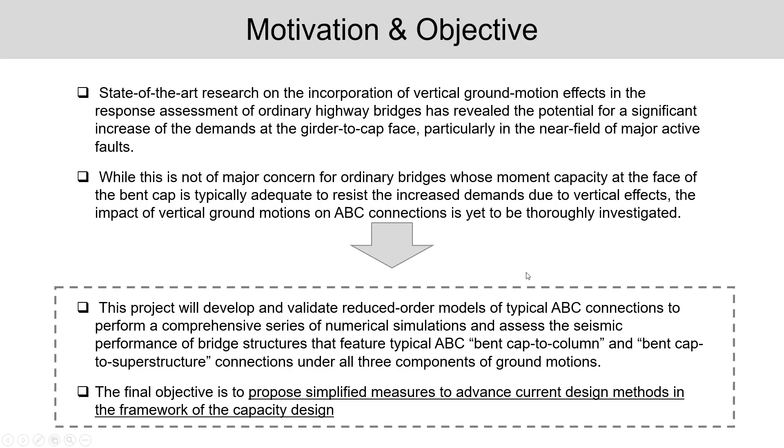I have been working with ABC connections and experimental earthquake engineering for the last 10, 15 years, and I can tell that this is a very challenging task. So some of the results that Dr. Petrone sent us to share with you today are really new and unique in this sense.

So what Dr. Petrone and her PhD student wanted to do in this project was a literature review first. We have so many options for seismic ABC connections. Which ones are the more common, the more popular, the easier at least to start with in terms of modeling? So the first task is just to shortlist the connections and pick one.

The second task is to build a micro model, a 3D finite element nonlinear model using one of the general software packages, and then use the results from the micro model to develop a reduced order model. Once you have a reduced order model, you can extend this to a full bridge. In this case, you can use software like OpenSees. These are much, much faster.

They are well suited to do system analysis for the full structure or the full bridge. They can do a lot of dynamic time history analysis with a lot of suites of ground motion. OpenSees, for example, is more suited to do hundreds of ground motions, unlike if you were to do it in ANSYS or Abaqus. So transitioning from a micro model to a reduced order model is of paramount importance for this project.

Then, they will identify a statistically significant suite of near-field motions. Again, for those who come from the seismic world, you might recall that the effect of the vertical component is highlighted in near-field motions. If you are close to the source of the earthquake, the vertical motion has high frequencies. The seismic waves that generate the vertical component arrive a few seconds earlier than the horizontal component.

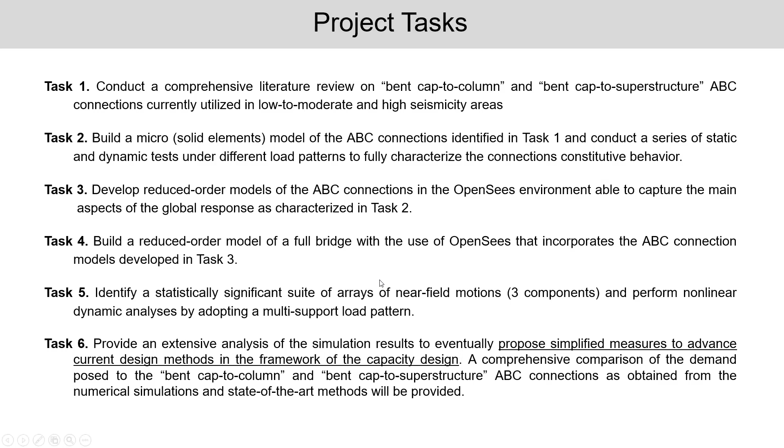So in terms of the first task, the identification of the connection: they did a lot of literature review, but this is just a final selection that they have made. They focused on precast bent cap systems. They focused on non-integral bent caps, although there is an integral bent cap. For those who are familiar with Caltrans bridges, 90% of their bridges use the integral bent cap system, and that is in high seismicity.

So they are looking into this as well, but this will be a second phase, or maybe in a future project. For this project, they are starting with the non-integral bent caps that are more suited for low to moderate seismicity. They are looking at the emulative cap pocket connection, where you have the precast column and the precast bent cap, and you have the pocket inside the bent cap, where you plug in the column,

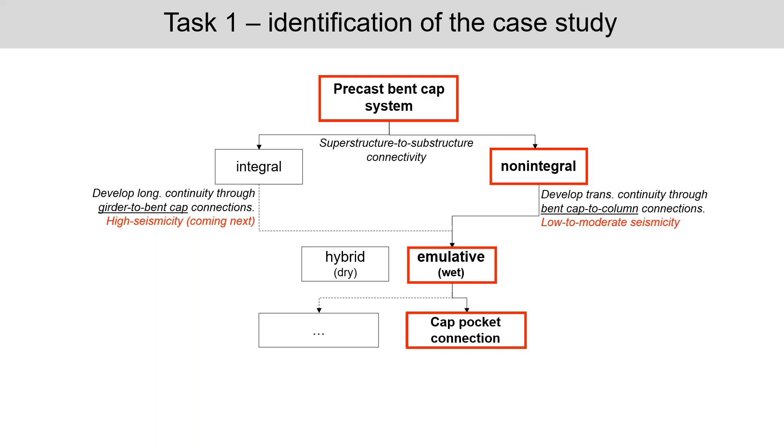and then you have the column reinforcement sticking out, and you fill the joint or the pocket with wet concrete. There is a dry version of it as well. But what they are looking at here is the wet cap pocket connection between columns and bent caps. So this is the selected connection.

Now that they have selected this connection, what did they want to do? They wanted to get some typical dimensions, designs, reinforcement in the columns, diameter, how much reinforcement in the cap beam, in the column, the connection reinforcement, and so on.

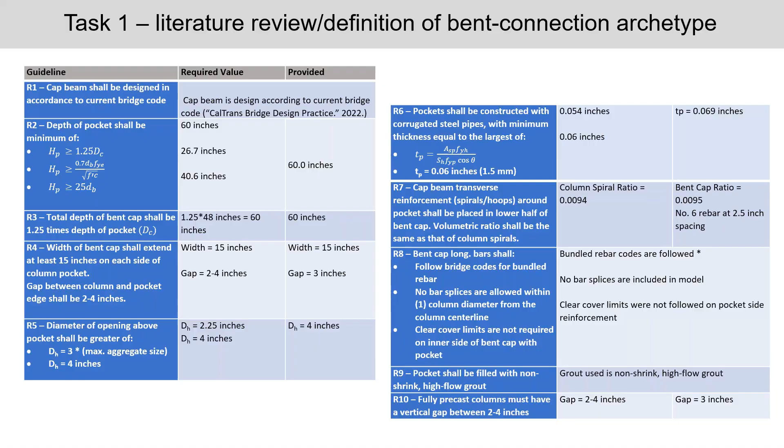So they went through some bridge archetypes, and they used them to generate their specimens, if you will, the new specimens that they will use for the micro modeling before they expanded it to the reduced order model. This slide shows the details, and you will be provided with a copy of the PDF, so later on the audience can take a careful look at the dimensions. These are also some schematics that show what you have seen in the previous slide, the final dimensions that they have used, and how they came up with these specimens.

These are, again, the numerical specimens. In the lab, we do physical specimens. In the finite element world, they do numerical specimens. The only difference between numerical and physical specimens is that you don't really need to do reduction in your scale. So you can see here that this is at the full scale of the bridge.

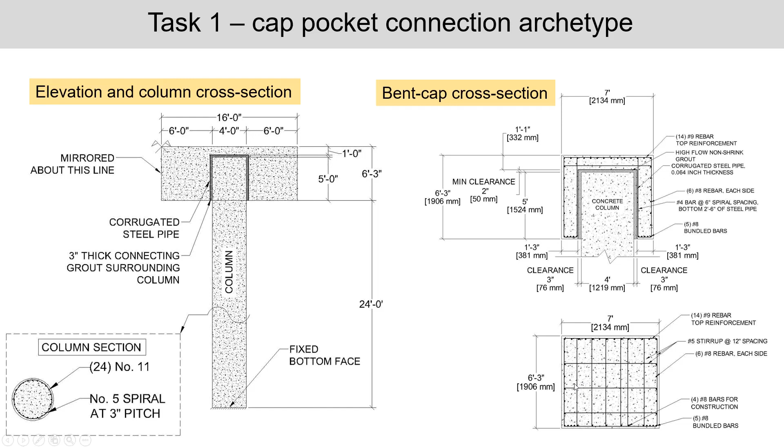So the column is an actual 4-foot column. The representative part of the cap beam and the depth of the cap beam, all these are the actual dimensions. It's just a sub-assembly, a part of the bridge, and this is the different reinforcement that they used for their design. So before they went to model the ABC connection, they wanted to calibrate some models.

The software that they used for this is DIANA FEA, a finite element analysis package from the Netherlands. They used DIANA for some very simple cast-in-place columns that were tested under pushover analysis, pushed through failure. So it has the full nonlinear behavior of concrete, including all different regimes of failure, like concrete spalling, core damage, reinforcement, and so on. So they calibrated their model.

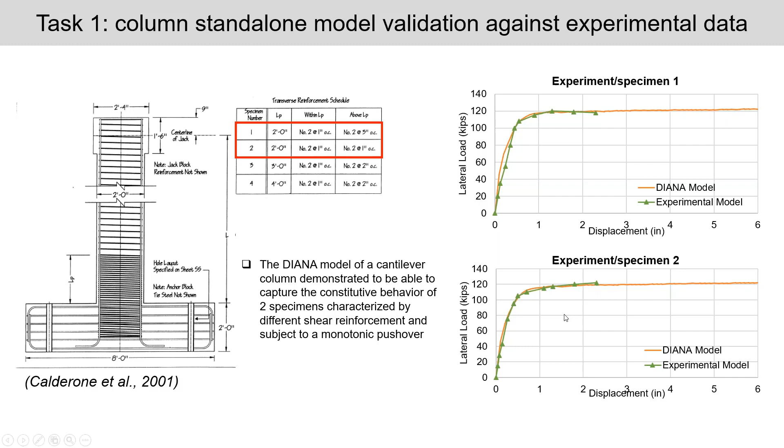They had some confidence that they can model concrete in 3D, and they proceeded further to the ABC connection. So the second task is to focus on the micro model in Diana for the ABC connection, and these are some pictures that you see here. Again, the bent cap, a column, and the connection between the bent cap and the column. There is a corrugated steel pipe that they have used. There is grout. So there are multiple materials here.

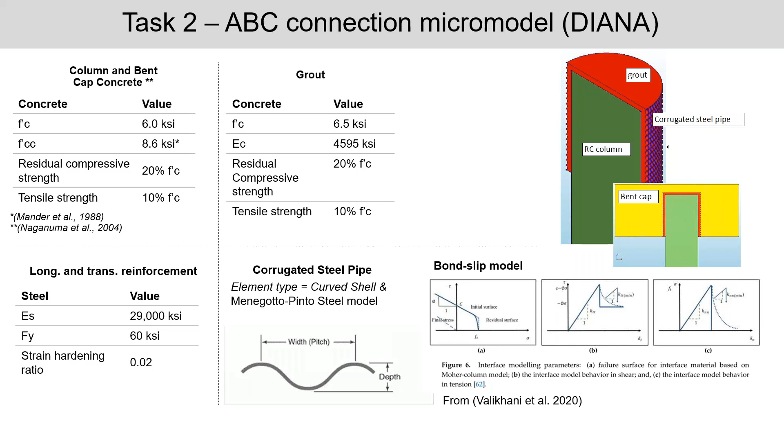And these are the details. Again, there is no need to go over the specifics here. There is a concrete model. There is a grout model. There is a corrugated steel pipe. There is the bond slip to account for the friction between the different materials at the different layers. So these are the final parameters that were used for defining the material models in Diana.

These are some of the results. First of all, before they went to look at the effect of the vertical motion, they just did a simple pushover analysis. And the pushover analysis that you can see here is just to get an idea where the failure happens: the grout cracks, the failure happens at the interface, if it were to happen, or it happens in the column and you develop the full plastic hinge in the column as intended.

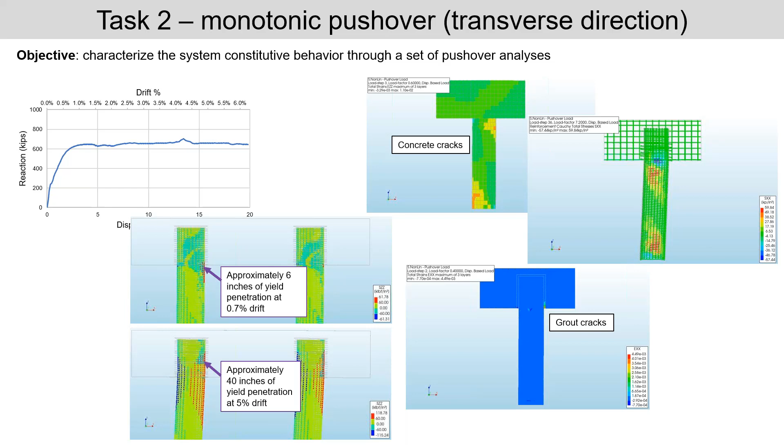So here they confirm that the connection survived, and the failure happens in the column as intended. That's a double curvature column, as you can see. So you develop two plastic hinges. So at least they had some initial confidence in the ABC connection model, and then they went to do the dynamic analysis only for the sub-assembly. This is not a full bridge. This is just a column with a sample or a representative part of the cap beam, as you have seen. So they did some dynamic analysis.

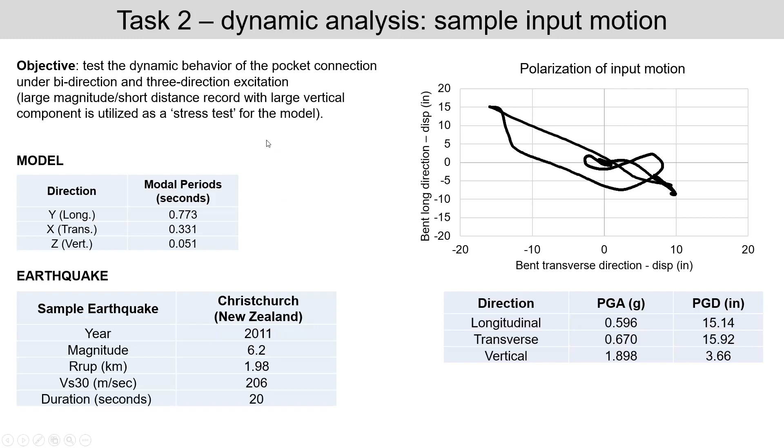Here, this is the plan view. If you were to look at the bridge from the top, this is the transverse direction, and this is the longitudinal direction. So that's how the column will work. And they have done actually the vertical excitation as well. So this was excited one time under only horizontal components and another time under all three components. And they have characterized the peak displacements and so on. But what is more interesting is not even this slide, the next one.

But here, what I mentioned a few minutes ago is the nature of the earthquake itself. You can see here the longitudinal, transverse, and vertical excitation, the frequency, and this is a huge difference. And this is how you can visually detect the vertical component or distinguish it from the other components. You see here, it looks more noisy because you have higher frequencies. So the vertical excitation by nature has much higher frequency than the horizontal components.

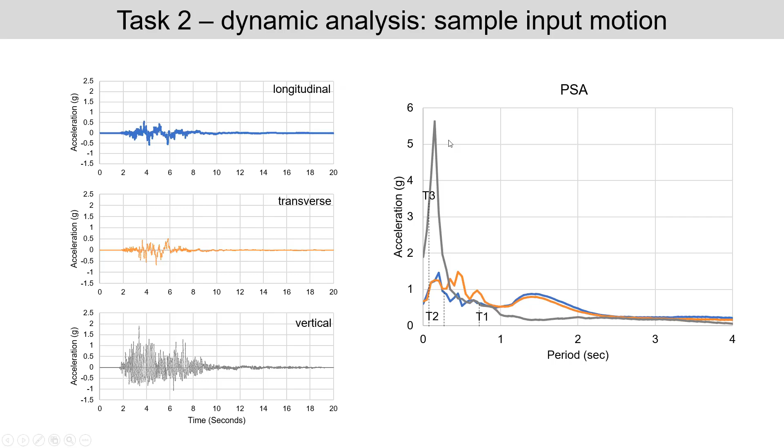For instance, that's the response spectra that is equivalent to these vertical excitations as well. At low periods, they have very, very high peak ground acceleration or spectral acceleration. So that's why vertical acceleration, if it is found to be important to account for, is huge, as you can see here. So it is not something that you can trivially overlook. And these are some of the results: transverse direction, longitudinal and vertical direction, with and without the vertical component.

So it's obvious that the analysis in the transverse direction is not as sensitive to the vertical component as it would be in the vertical direction. So whether you account for the vertical component of the earthquake or not, the bridge behavior in the transverse and longitudinal direction is almost the same. With the overturning associated with the lateral components and the abutment effects, from a full bridge perspective, it is even less expected to have any change in your longitudinal and transverse direction response because of the vertical component.

Nevertheless, if you look at the vertical direction now, this is very dependent on the vertical component. So whether you account for the vertical component or not, you can see here you have almost 30% higher displacement that can be overlooked if you're not accounting for the vertical component.

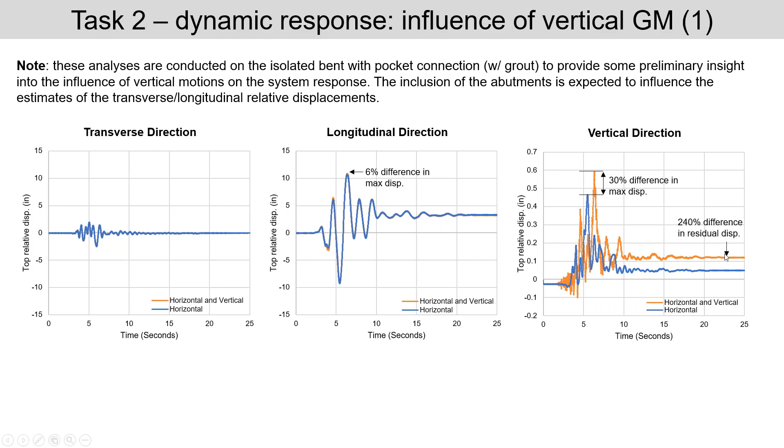And more importantly, when it comes to the plastic damage and the post-earthquake residual displacement, we have a 240% increase in the residual displacement in the vertical component. So this is again just some more pictures. For the interest of time, let me get to the next task.

What they wanted to do, they wanted to do a reduced order model in OpenSees. As I said, the motivation for this is that they can extend it now to the full bridge. They can do different prototypes of bridges, different ground motions, a large suite of ground motions, and so on. So that's some of the basic features of the reduced order model. The connection will be modeled using some springs between the column and the beam.

So the column and the beam here, what you see here, the yellow dots, this could be a precast column with a precast beam connection, and you can just have a whole bunch of springs at the local level here, which they are working on calibrating now. There will be springs, of course, at the foundation level. There are springs for the abutment. These are well defined now, and the literature provides tons of information about these types of connections.

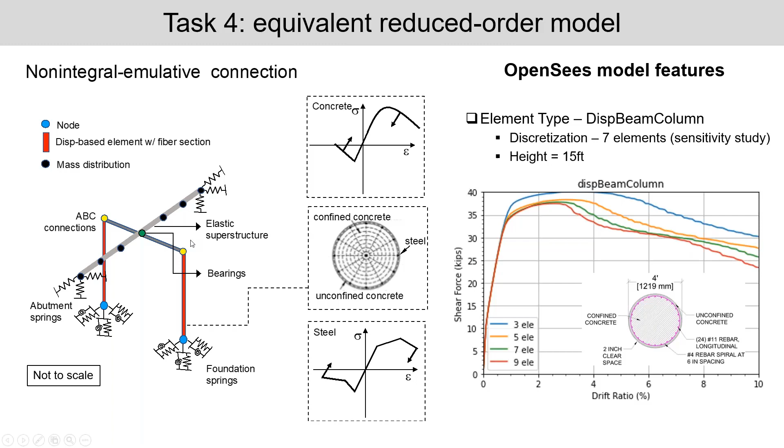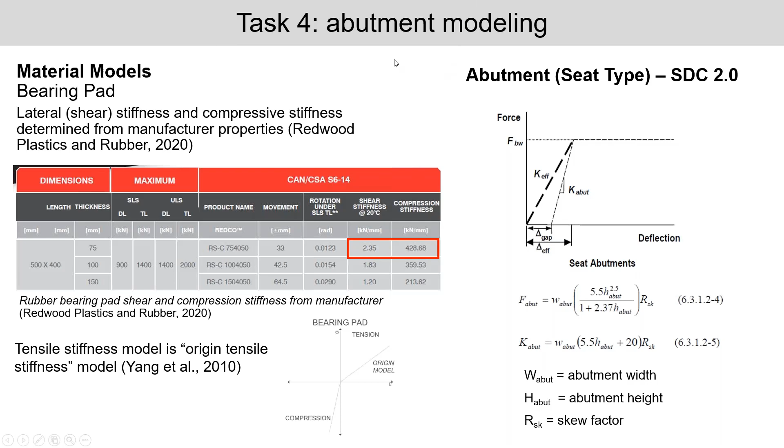But when it comes to ABC connection at the local level, this is yet to be developed, and that's what Dr. Petrone is working on with her students. That's again some of the model validation, but using OpenSees, not the Diana one. And they extended this to a full bridge model, as I said. So they are looking at the abutment as well. So these are all more details.

I think I need to end it here so that I can leave some time for questions. I think what's more important is to note again the big picture. The big picture here is that vertical components shouldn't be overlooked in some of the local ABC connections, especially if you are in the near fault, like in California, for example. This is something that needs to be accounted for.

There is a good ongoing effort to provide some modeling guidance, not only guidance on the design, but also on the modeling part, how to go for a reduced order model using OpenSees or something similar at the local level that can account for the ABC connection physically using springs, not just the very crude assumption that we have been doing for years, that we just model an ABC connection as if it's a cast-in-place connection, assuming they have comparable behavior.

Now, this project will provide some guidance on local behavior and local modeling for ABC connections. And eventually, when they are done with this project, there will be some guidance on the effect of horizontal only versus horizontal and vertical earthquake response of ABC bridges. Dr. Petrone has leveraged a couple other projects, and she has a full PhD student dedicated to it. The project is not completed yet, but along with the other projects, there will be a lot of good design guidance that will come out of this project.

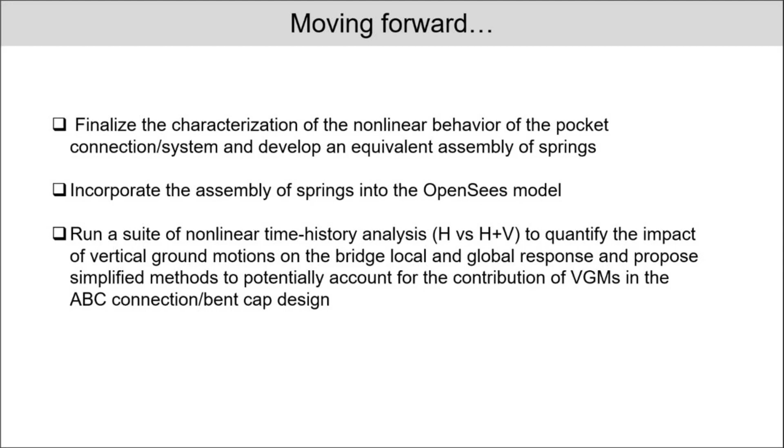Would you also compare the behavior of monolithic connection with precast connection? Oh, that's an excellent question. I don't know if they are willing to do this, so I cannot answer on their behalf, but I can pass this question to Dr. Petrone. That's a very interesting point. Since they will have all these great models at the micro level and at the macro level, why don't they look at monolithic versus ABC connection in this case? I will pass this comment, but I'm sorry, I don't have an answer. I don't know if they are doing it or not.